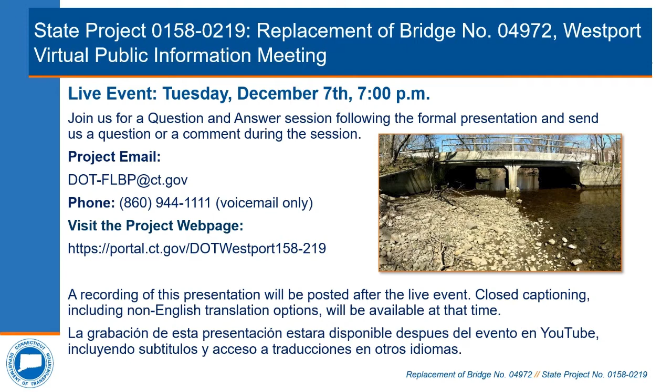Replacement of bridge number 04972, Greens Farms Road over Sasco Brook, located in the town of Westport. My name is Preeti Bardwaj, and I am the project manager assigned to this project. We appreciate your willingness to participate in this forum virtually, and we hope that you will find this meeting both

interesting and informative. I would now like to go over some of the goals and format for tonight's meeting. I will be explaining how you will be able to interact with the project team. I will explain how this project is funded in the Federal Local Bridge DMS, or Design Managed by the State program. We will then have some welcoming remarks from the towns of Westport and Fairfield. I will then be introducing the project team, including the department's front office leadership, the department's design team, and our consultant liaison engineer team. This will then be followed with a technical presentation of the design, which will include the condition of the existing structure, purpose and need for the project, and the recommended design solution, which has progressed to a 30% design completion. As part of the department's public outreach program, it is at this point that we are now reaching out to you, the public, while it is still early in the design process, to receive any comments or concerns or answer any questions that you may have. We will also have a representative from the department's right-of-way unit to explain the rights-of-way process. And lastly, we will have a live question and answer session.

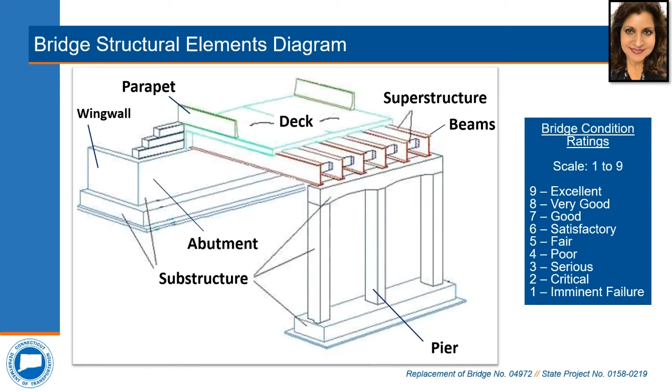Now that you are armed with basic bridge knowledge, I would now like to introduce Mr. Andy Shepard from Close, Jensen, and Miller, who will be presenting the technical portion of the presentation.

Thank you, Preeti. I'll go over the existing structure and the deterioration, as well as the proposed replacement project. This project is located about 0.2 miles west of the Greens Farms Road intersection with Route 1, or Post Road, and is functionally classified as urban local.

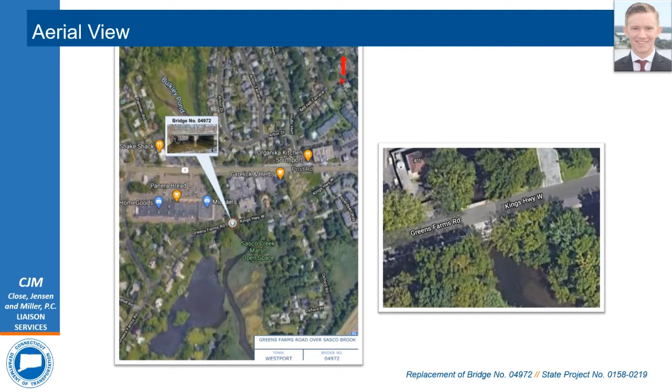The existing structure was built in 1973 and consists of a 2-span reinforced concrete 3-sided rigid frame supported by a reinforced concrete footing and a reinforced concrete pier between the spans. The total structure length is 35 feet with an out-to-out width of 36 feet 2 inches and a curb-to-curb width of 28 feet 2 inches.

The estimated 2021 average daily traffic, or ADT, on the structure is 1,640 vehicles per day. There's 1 lane of traffic in each direction and substandard pedestrian sidewalks on either side. The bridge rail consists of a 2-rail pipe with posts embedded in the concrete curb along each side.

There's a 4-inch gas main that spans the channel by resting on the wing walls with a steel support on the central pier at mid-span on the south fascia of the bridge. A drainage pipe outlet is located in the northwest wing wall. A sewer line approaches the bridge from the west and terminates at the pump station immediately northwest of the structure. No overhead utilities are present over the structure, and all overhead facilities end just to the west of the structure. Initial utility coordination has been sent out, and a formal utility coordination meeting will be held later on.

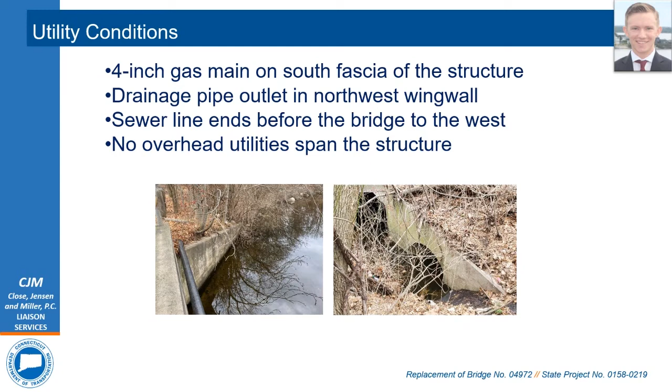The bridge deck is in poor condition with a rating of 4 and has areas of cracking with spalls and potholes. The steel pipe rails and posts have isolated areas of moderate rust. The approaches are in satisfactory condition with a rating of 6 and also have areas of cracking and some bituminous patches.

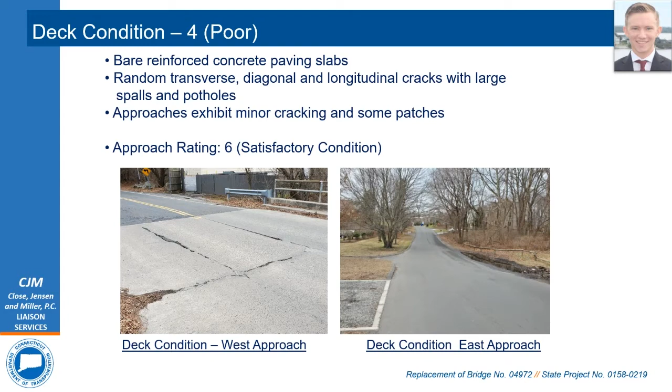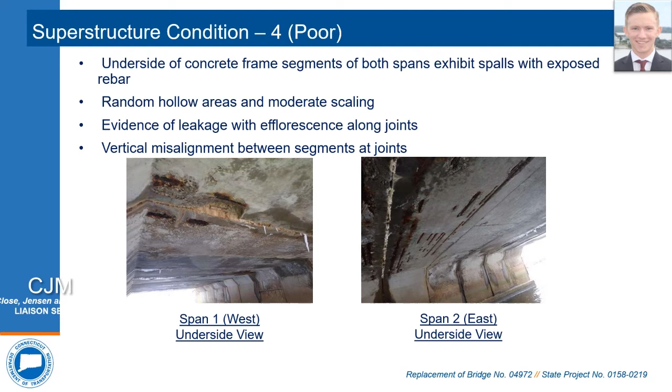The superstructure is also in poor condition with a rating of 4. The underside of the concrete frame segments in both spans have spalls with exposed rebar along with hollow areas and scaling. There's evidence of leakage with efflorescence along the joints, and the joints are also misaligned between various segments. Here's just a few more photos of the underside conditions of the bridge, showing the spalls with exposed rebar and the leakage along the joints.

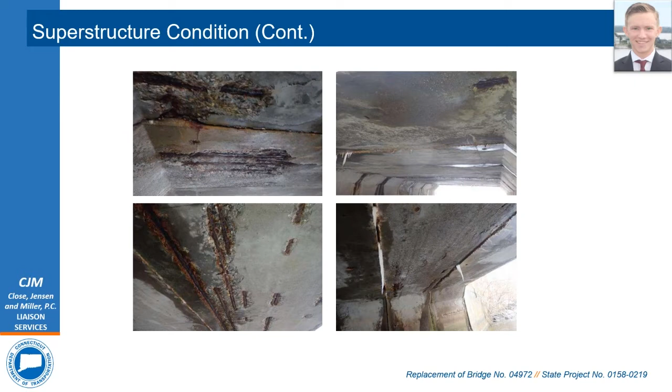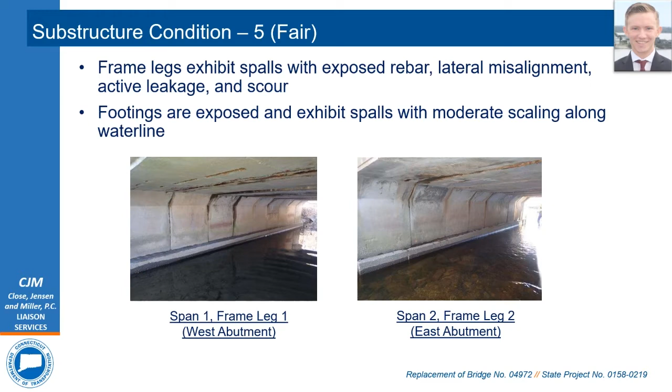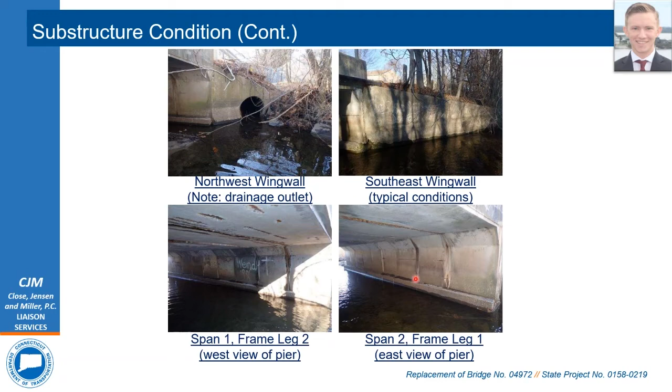The channel has a rating of 6, and scour is noted with a rating of 3, signifying the structure as scour critical. The upstream channel has moderate to heavy undercutting with exposed tree roots throughout. There's areas of heavy timber debris and heavy vegetation growth on the channel embankments. There's also moderate scour along span 2 due to increased flow in that span, as well as a reduced flow outlet in span 1 because of a large area of gravel and stone accumulation, which you can see in the photo on the right.

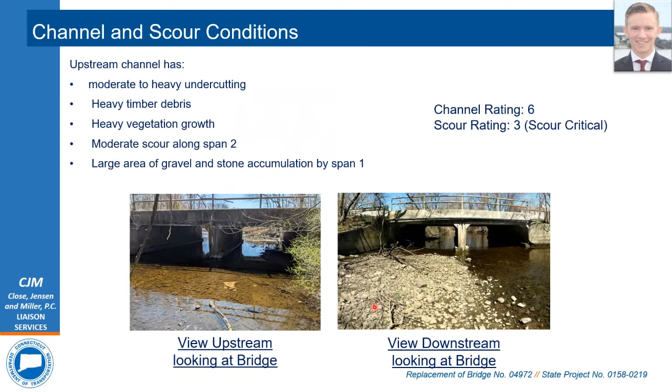Because of all this, the proposed project is to replace the existing structure with an AASHTO concrete box beam superstructure on pile supported integral abutments.

The structure will have a total structure length of 68 feet with a clear span of 60 feet, a curb to curb width of 32 feet consisting of 12-foot travel lanes and 4-foot shoulders. The use of sidewalks on the bridge was discussed with the towns, and as there are no sidewalks on the existing Greens Farms Road, the use of widened shoulders was agreed to be the most practical option.

All driveways in the construction area will be reconstructed due to a raise in the roadway profile. The existing gas main will be replaced in kind on the fascia of the proposed structure upon completion of all construction activities.

This is an elevation view of the proposed project. It shows the bridge as if you're in the river looking at the structure. Similar to the previous slide, the proposed structure is shown here in orange with the wing walls in pink. The new concrete box beams are in red and the bridge rail in yellow, and the pile foundation is shown here in brown.

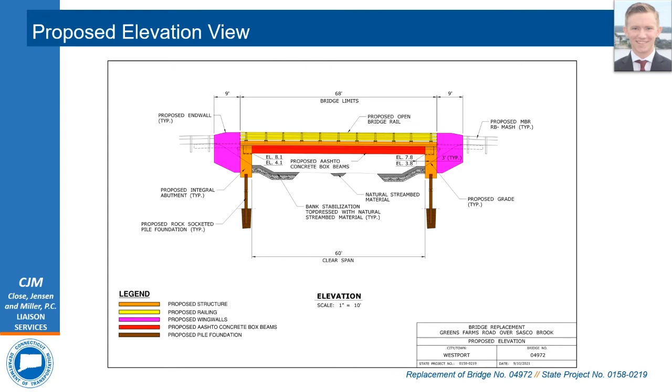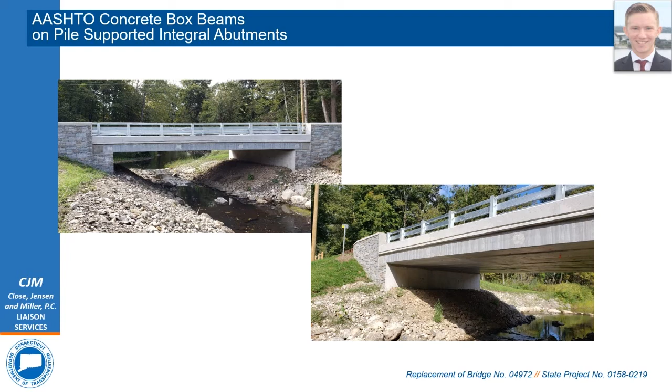These photos are from a similar project and just show basically what the bridge could look like, to give an example.

The roadway profile has to be raised to meet spot improvement criteria, and due to the various design issues seen at this location, the raise in profile is also due to an increase in span length and the removal of the central pier. As I said before, this will affect the driveways, but each will be reconstructed.

The proposed bridge will be constructed with full road closure for the duration of construction, or about 8 months. The detour here is 1.2 miles, or about 4 minutes, and includes Greens Farms Road, Route 1 or Post Road, and Bulkeley Avenue.

Stage construction was determined not practical due to cost, water handling, and the additional construction time required to maintain the roadway during each construction phase. We also want to complete the project in a single construction season.

Rights of way in the vicinity of the bridge varies. The drainage pipe here to the northwest that's being replaced extends beyond the limits of rights of way, and because of this, a drainage rights of way and construction easement is needed.

The new low point in the roadway means that the existing catch basin here will need to be removed and replaced further east. This means that here in the southeast corner, a construction easement is also needed for the new drainage pipe that's being installed.

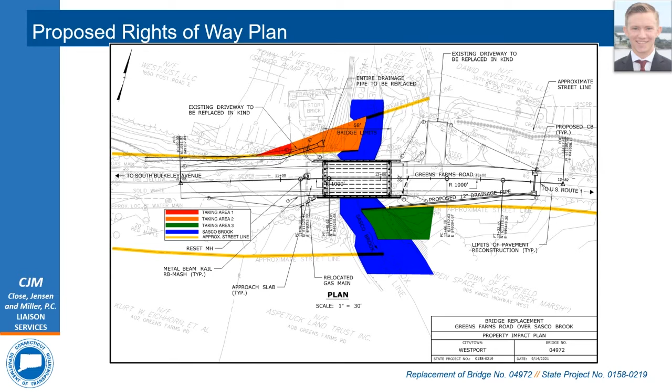We're anticipating about 4 permits here: local inland wetlands permit, Army Corps of Engineer pre-construction notification, flood management certification, and structures dredging and fill.

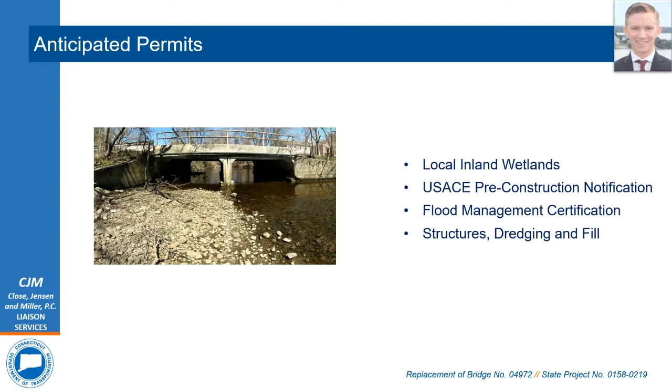Construction is anticipated to begin in the spring of 2023 and take about 8 months. Estimated cost of the project is $2.29 million, and of that, the towns will be responsible for 20%, or $458,000.

I'll now turn the presentation over to Dennis McDonald to briefly go over the rights of way process.

Good evening, everyone. My name is Dennis McDonald, and I'm a representative from the Connecticut Department of Transportation, Division of Rights of Way. I'm just going to provide a brief overview of the right-of-way process.

The function of the Division of Rights of Way is to acquire all property and property rights necessary for the project. This is done in accordance with Connecticut General Statute Section 13A-73, 13A-98e, and the Uniform Relocation Assistance and Real Property Acquisition Policies Act of 1970, as amended.

Your typical right-of-way impacts include partial acquisitions, easements, and rights. Impacts are subject to change as the design progresses, but this gives a general idea of typical property impacts.

Once property impacts have been established, each impacted property owner will receive a letter of intent to acquire along with a property acquisition map. The letter essentially initiates the right-of-way process, and the map provides a detailed overview of the specific right-of-way impacts. Soon after the letter is received, an evaluation process will take place, and once a value has been established, each impacted property owner will receive a written offer of compensation.

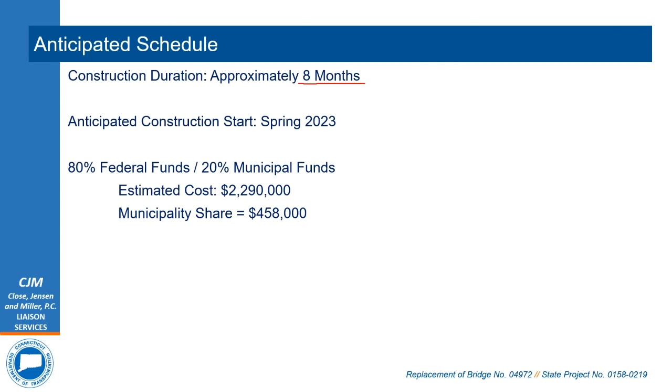Okay, great. Another question: How much higher is the new bridge deck and where will the runoff go? Andy, would you like to take this question, or Mike Brady from CJM?

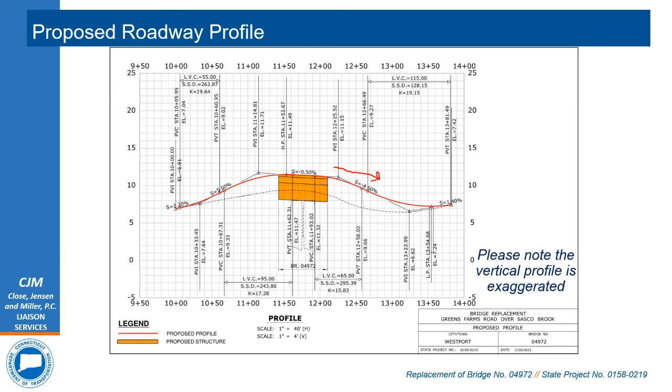I can start out. So the new bridge deck is about 2 feet higher, which means the runoff will run more towards the east where the original drainage basin was, but we need to make sure we move it back a little bit more due to the new roadway profile itself.

Next question: Where will the staging be done? We would expect the Fairfield side, given residential is much closer on Westport. Andy would you like to take this question? Yes, staging can be done mostly on the approaches. And since Westport does have one residential property closer, we probably will be more on the Fairfield side, but that'll be up to the contractor once we get them on board.

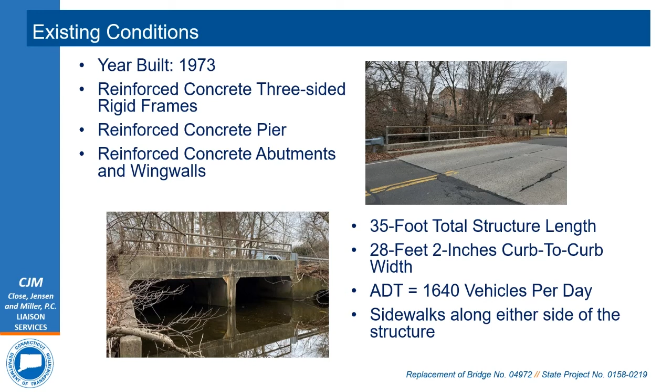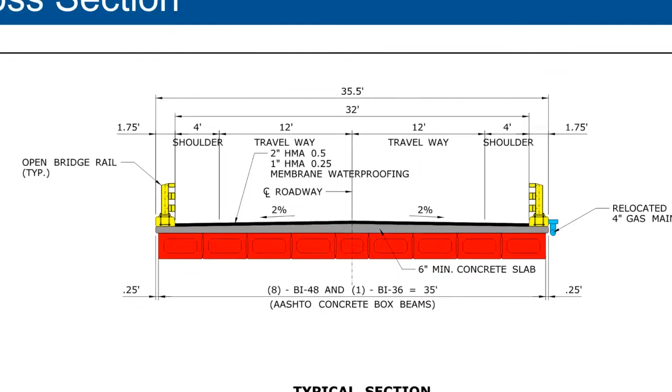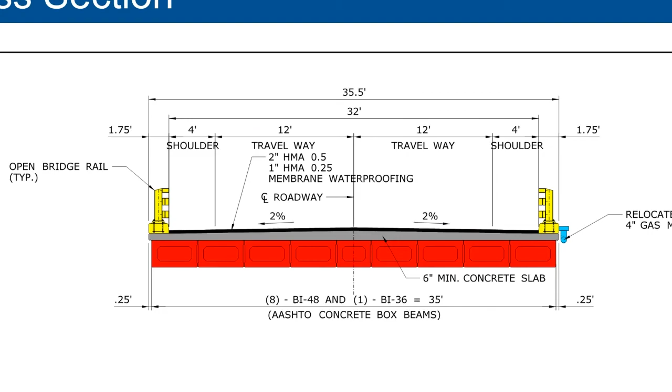We have another question: We would request that all traffic on Greens Farms Road coming from the west be diverted to Bulkley. Andy or Mike from CJM, would you like to take this question? This is Andy from CJM. Yes, the detour we have includes Bulkley Ave, and it goes from Greens Farms Road to Post Road or Route 1, and does include Bulkley Ave. We'll make sure to include your comment and make sure the detour is in place according to what the public needs.

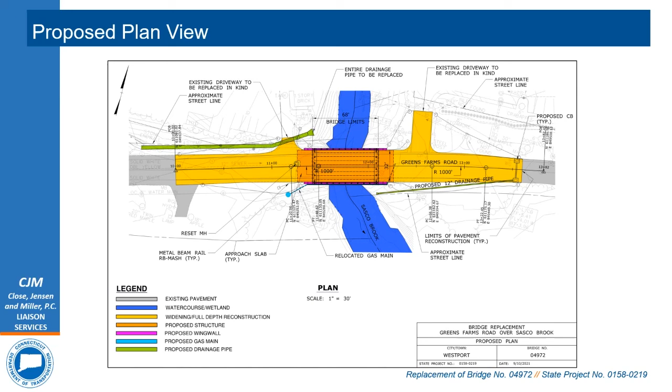I'm looking at the pictures of the trees in the immediate vicinity of the bridge, and they're mostly scrub sumacs and other things. We're not going to be clear cutting for the bridge - just cutting those immediately near the bridge. Actually, what replaces it will probably be better than what's out there now in terms of beautification.